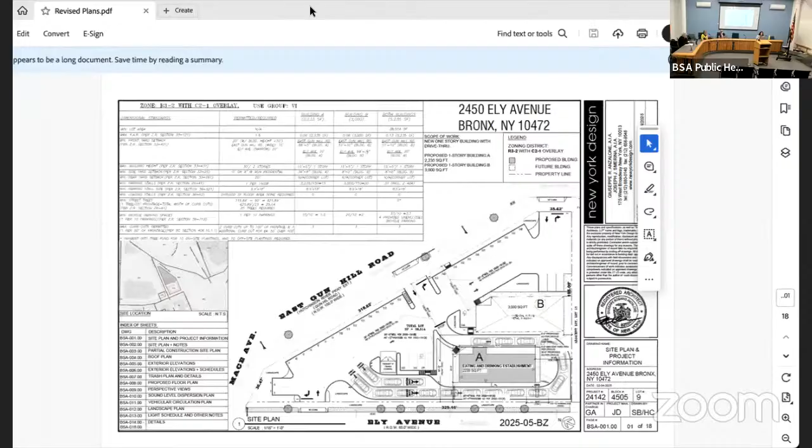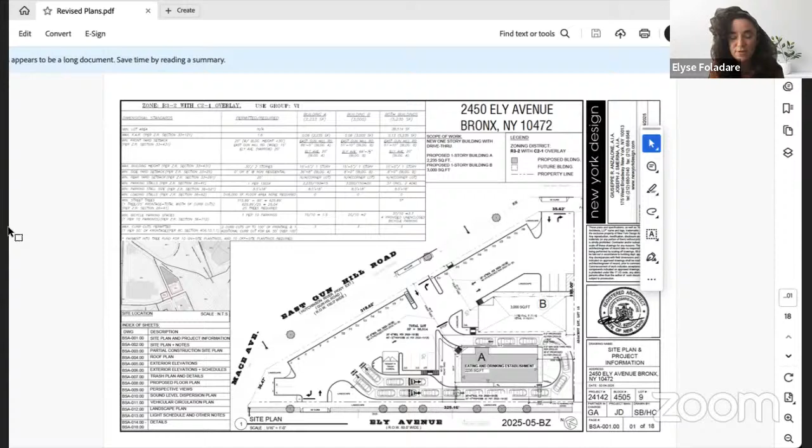Okay, here's the plans, sharing now. Everybody see the plans? Yes, okay great. So we did submit, hopefully, a darker set. I'm happy, Joseph can tell you, but he's happy to remove any excess notes and fix any sections that need to be fixed. Josh, do you want to talk a little bit about the big discussion about maneuverability and curb cuts? I'll just turn to you. If you want me to share any specific screen or your memo, I'm happy to do that. Maybe this - can we just, for simplicity, go to the radius map diagram of the roadway network of New England Thruway?

Yeah, that needs to be corrected. We need to see the roadway network of the New England Thruway coming out and off, and that needs to be corrected. The approach exit from the New England Thruway ramp is not lining up with the site, as you can see from this. Right now the approach is showing an entry ramp to New England Thruway, but it's not showing the exit ramp, so the placements are incorrect. Please go through the aerial map and correct it, because we need to understand what the traffic network and directional flows are when analyzing this site.

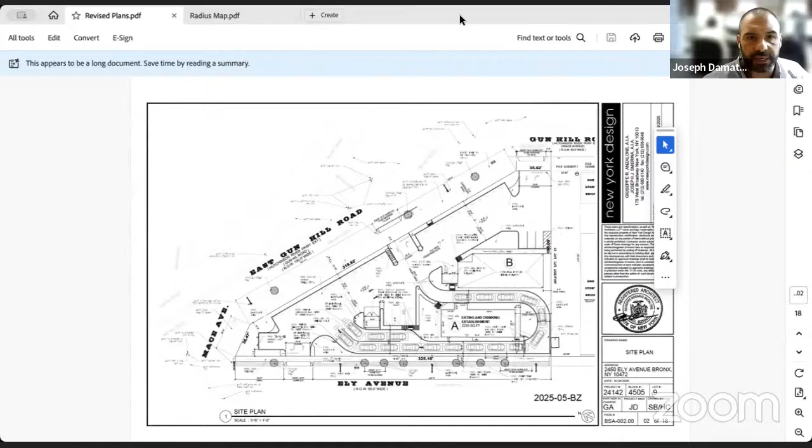Fair enough. Joseph, that comment was mostly for you. You got it. I think that was for Josh, yeah. Well, she's saying it's on the plans. Well, I don't know who does it, but I think the plans actually show it - my site plan shows that exit and entrance. Okay, 'cause Josh doesn't provide any plans. That's why I'm saying it's for you - a diagram, the radius diagram, that was just up. I can address it either way. Okay, I think that's right.

Please make them consistent. Wait, sorry, I'm a little confused - are we saying the radius is correct or not correct? No, it's not correct. Oh, the radius diagram is not correct. Okay, that was just provided by Urban Cartographics, so I will ask them to fix it. Yeah, the radius diagram is not correct.

And as I'm looking at the little site location map that has been provided - this one?

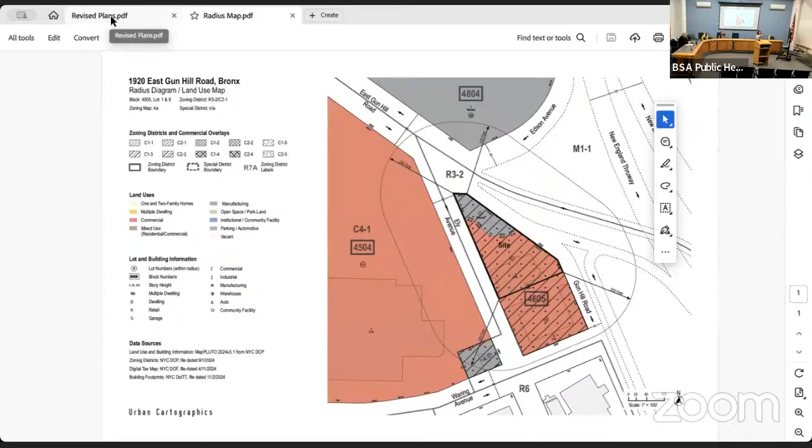Yeah, okay, sorry, that was from Urban Cartographics. I'll ask them to correct that.

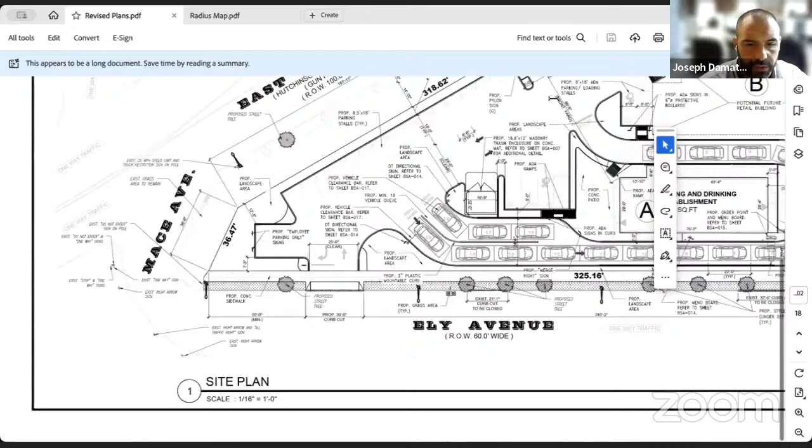And the site location map from here, I definitely do not know if it is correct or not. I do see one ramp exiting out, but I did not... if you zoom in, we have the arrows identifying that there's an exit there, and then the entrance is that one-way entrance. I can make it darker on this plan, but I believe it's all on there.

It's this, correct? That seems to be correct to me. It just needs to be darker. Okay, not a problem.

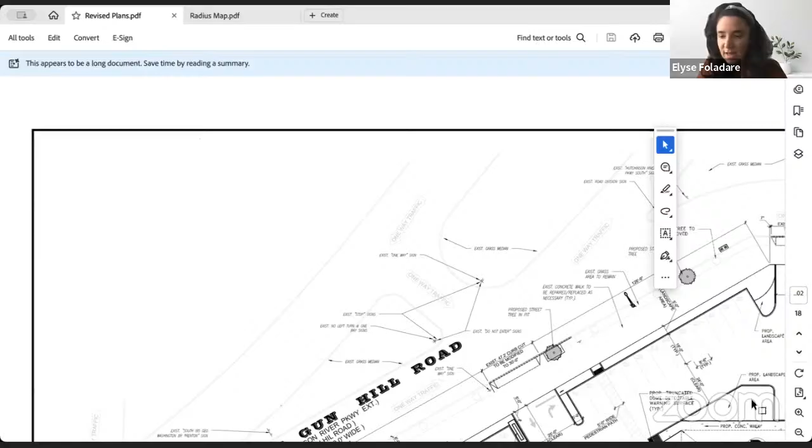Okay, so back to the curb cut conversation, I guess. And is that site location, Commissioner Ottley-Brown, can you also verify the site location map? If that exit ramp and on ramp to the Thruway is correct, because to me it doesn't seem to be.

No, it does. It actually looks like what you see if you look at the Google Street View. It looks like the exit comes off right where the curb cut is, and the entrance is just maybe 100 feet away to the right of the curb cut. So it looks like it more or less lines up.

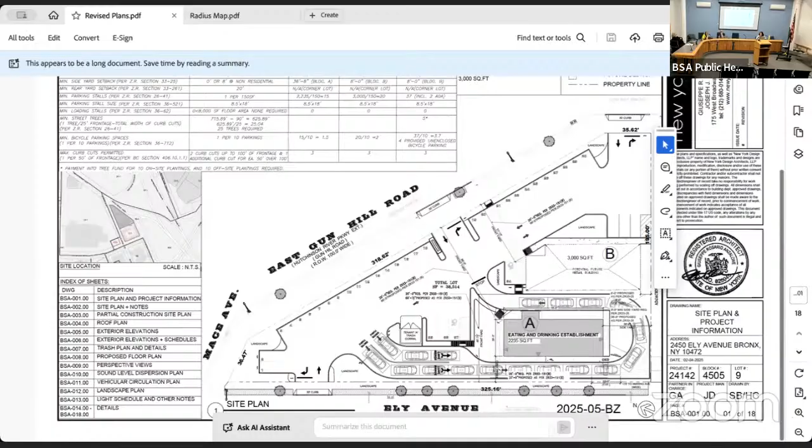I think, can you go to the previous page? And then zoom into the site location map on the left. I think that's what you're talking about, right? Oh, you're talking about that? Yeah, I'm looking at the site location because... yeah, you got to zoom in for that so I could see it better.

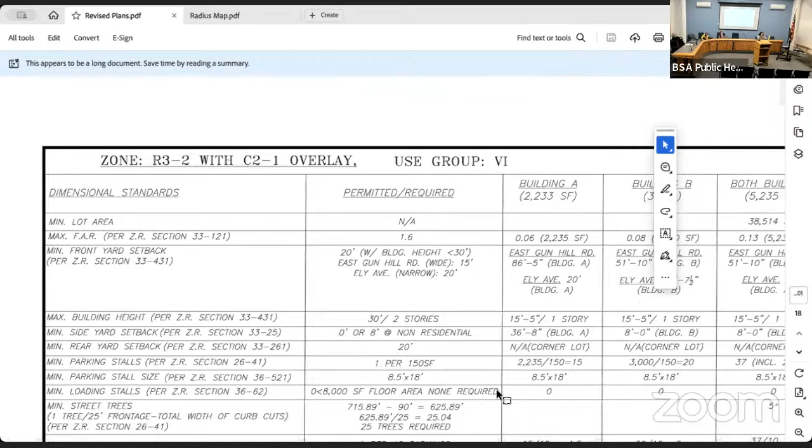Or let me look at my own plans, which I had brought up. Because I think it's the exit ramp from the New England Thruway and the on ramp to New England Thruway in the site. Not right, that's why I'm asking. I'm gonna just look on my own plans right now because I can make them larger. Let's see, okay.

And I'm being fussy about it because this is a very unusual site. We don't, most of our sites tend to be part of the typical city street network, and this is right at the mouth of the major throughways. So we have to be very careful.

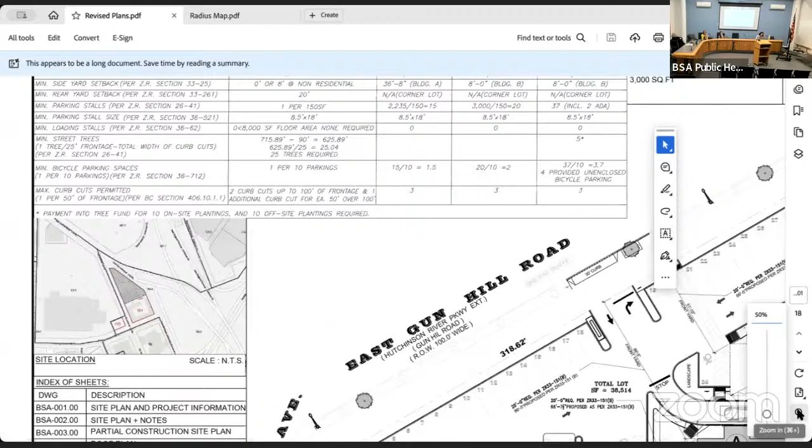It appears to be correct to me, looking at it, but because there are no dimensions and there's no curb cut shown on that little site location, it's hard to see whether or not it's lining up with the curb cut, but it is what you see there. There is that exit ramp that curves around, and then the entrance ramp is shortly after that.

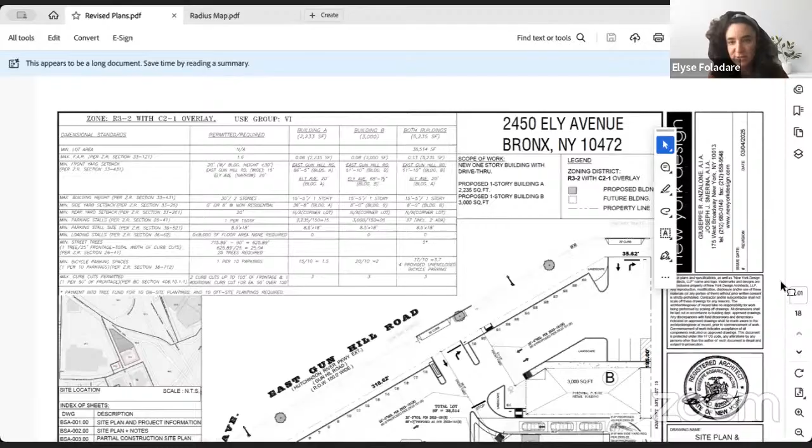Okay, so please make these graphics very clear so that it's absolutely clear to anyone who's reviewing it where the on and the off ramps and the approach ways are. And I think we're going to, as you suggested, do a maneuverability plan on its own page, so this way it's all dark, it's all clear, all the directional signs are there. So we'll add that plan. Okay, go ahead.

Okay, so back to our thoughts on the curb cut, right? Yes, so we heard the comments. Good morning, everyone. We heard everyone's comments on the curb cut, and understood the concerns about the traffic that would go pretty much straight through that median cut through.

So we were thinking, based on those comments, to shift the driveway further to the east to alleviate any concern about that, that people wouldn't be able to drive straight through. They would have to turn out of the site to go either west on Gun Hill Road or towards the thruway.

And then, in terms of ingress movement from the curb cut, people would have to turn through the median. They'd have to turn left onto Gun Hill Road and then turn into the site. So it basically alleviates any concern there about people shooting straight through the median and turning onto westbound Gun Hill Road.

So just so I understand what you're saying, so if I am coming off the New England Thruway exit, instead of coming straight into the site, the curb would be located a little further east of it?

Correct. So if you're coming off the New England Thruway, they would turn left onto East Gun Hill Road, and then turn right into the site.

So I have a question. I know you say you would consider moving the curb cut to the east. But to me, if you move the curb cut to the east to solve the problem of people coming off the northern exit ramp and shooting across all those lanes, you're going to have a similar problem with people exiting the site and shooting across the lanes to get onto the entrance ramp. It's kind of like swapping one problem for another.

What if you were to move the curb cut to the west along the site, which would force people to not use that northern exit to get onto the site? They would have to go onto Gun Hill Road and loop around somewhere to get onto the site. So you'd get rid of those people, and give enough room for the exiters to merge their way onto the highway - give them a little more linear feet, which might make it safer.

Yeah, that's something we could definitely discuss with the client. I don't see an issue with that unless Elyse or Joe, you do. But that's something we can discuss with the applicant.

We're losing you, sorry, we can't hear you, Chair. Yeah, I can't hear either. Can you hear me now? I can now, yes. I literally have to hug the thing. I don't know why it's doing it.

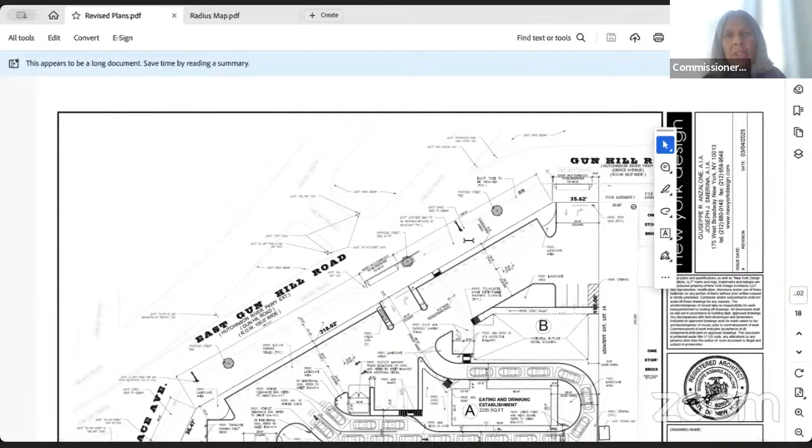I think that's a very good comment, and that's something we can address on our end.

We can't hear you. The audio is cutting out again.

So anybody trying to enter on East Gun Hill Road, that entrance would be moved further westward, allowing for entry and exit. This way, whoever is exiting can continue on East Gun Hill Road and merge with New England Thruway or Hutchinson. But anybody exiting from New England Thruway would have to make a left and take the entrance further to the east to enter the site. Correct, correct, okay.

That can work, and that can remain as an exit also, a secondary exit if someone wants to go to Hutchinson and avoid merging onto the New England Thruway. Yeah, that may work. Tracy's raising her hand.

Go ahead, Ms. I just had a question on the existing site plan, the one we reviewed. Did you have to go to DOT for any of those curb cut approvals, or would that just be if you moved that one to the west?

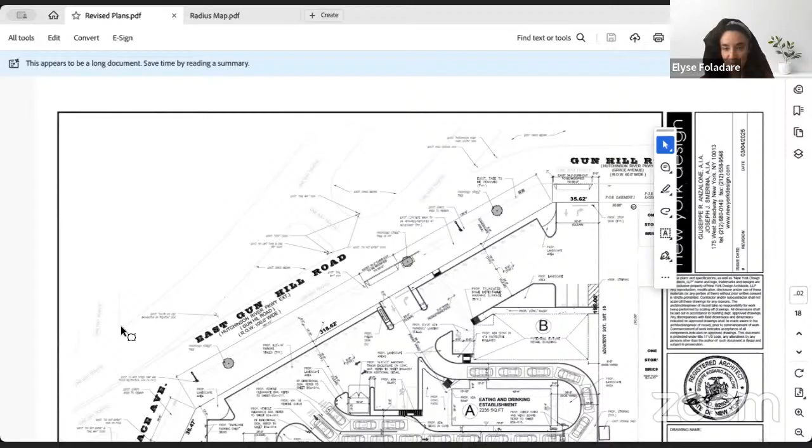I think a big comment was about landscaping and where to put fencing. Joseph, did that all make sense to you? Do we want to go through where the fencing and landscaping would be? We can show you samples. Yeah, I mean it was pretty clear, it's along Ely Ave.

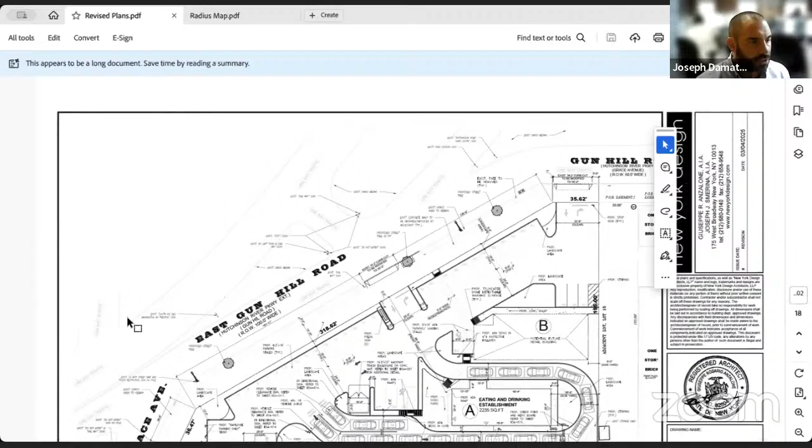Prevent the pedestrians from crossing the site. It's understood, we will provide a fence at that property line. We showed a landscape plan with all the landscaping and specific plant type on the site. I'm sure it'll be a little more legible on the new revised applications. Elyse, if you can just scroll down into the landscape plan.

And also I wanted fencing between the building entrance and where the drive-through is. What I mean by that, for example, where vehicles 14, 12, 13, 11 are, there should be a fence, or a raised curb, around that area that will prevent pedestrians from crossing over and across through the driveway.

Between the two buildings? Yes, one is between A and B. So you have A and B, where you have the... I don't know if that's a curb cut. It is, yeah, it's a pedestrian curb cut. So you can go from one side of the parking lot to the other.

You need to have a stop bar there and a stop sign. You have a stop bar out beyond that. So you need to mark that pedestrian crossing very clearly, so it's clear.

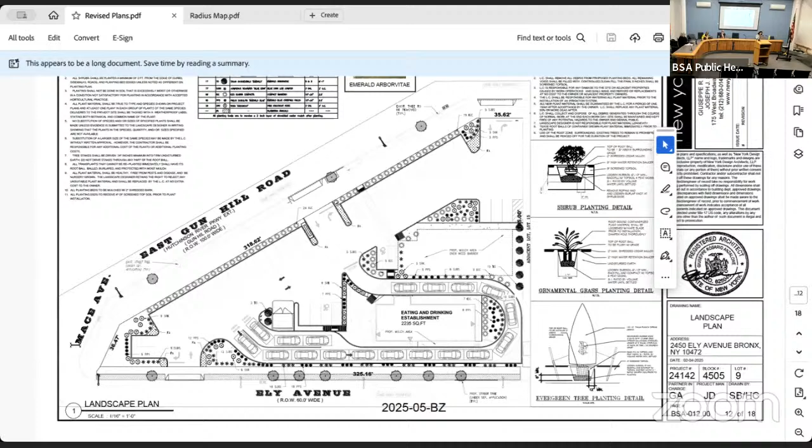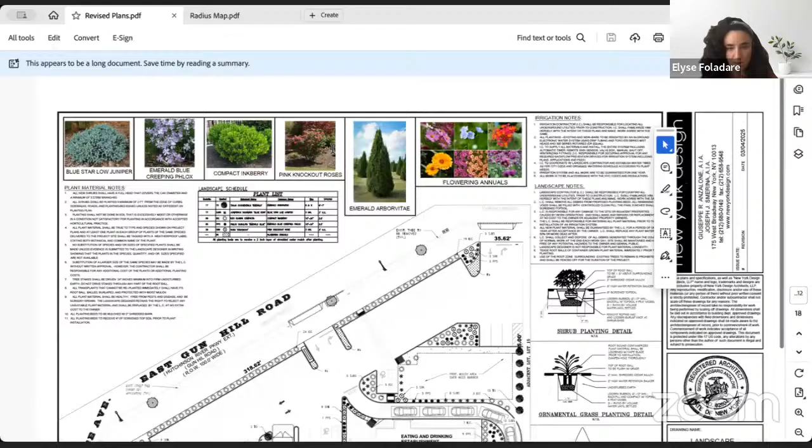Understood, so the fencing will add, but is this landscaping what you're looking for, or is it missing items? I don't see anything on the landscaping for me to understand what's there and what's not. Oh, so you'd like a schedule detailing... oh, this is a plant list right here. Yeah, but I don't know where those plant lists are going to be located. Oh, because it shows you the type, the detail, and symbols. Yeah, is this a recent submission?

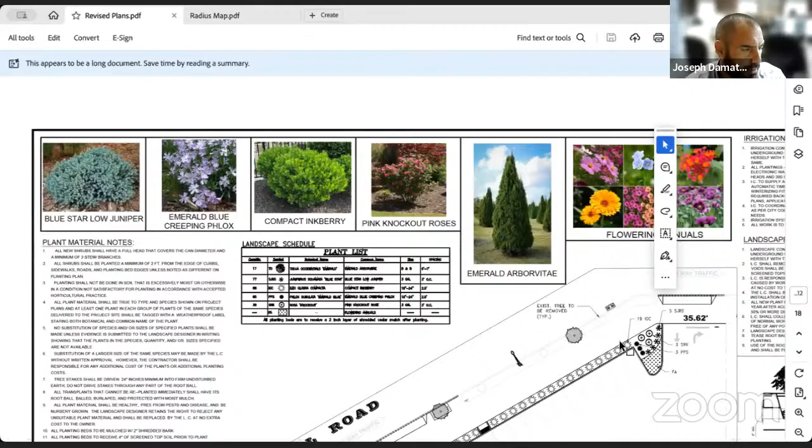Because I don't remember seeing this. There were a bunch of questions last week and we submitted them late Thursday. This was in the original submission, he said. We just added some clarification and made it more visible.

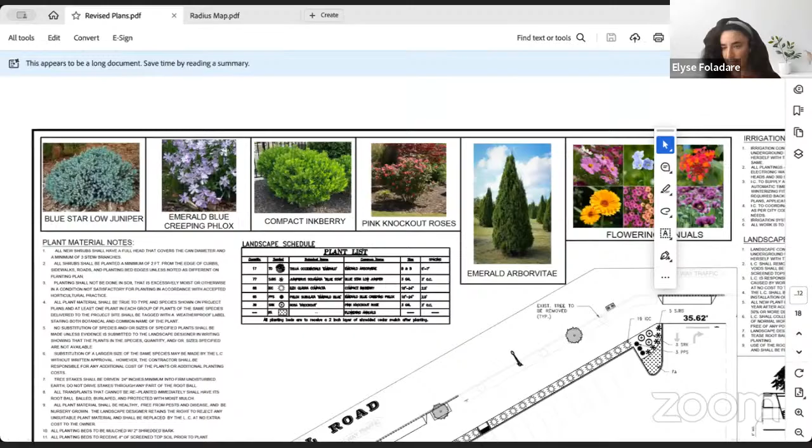So maybe we'll resubmit this with fencing included. I'm surprised that I missed this. I was looking for it and couldn't locate it, so my apologies. No problem, it's a large set, there are 18 pages. And we will remove the structural footing plans, as the commissioner had asked. That's not a problem.

I also see the plants in the back, those are along the rear. Can that be extended to the corner? As you can see, the actual lane goes up against the lot line there. Right, so it's gonna be very tight, there's no plant area. I understand that, but what about that corner where you're planning to stripe it?

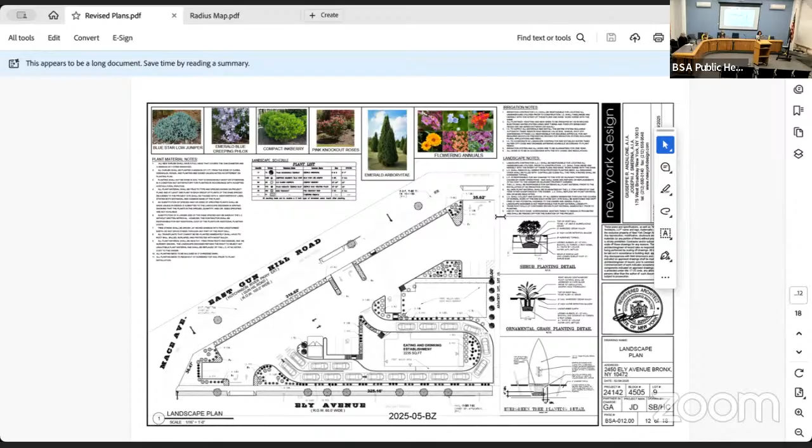Instead of striping it, can you put planting there? I don't remember, can I ask my team a question? Did he want to do access or something, cross access? Yeah, I don't think he wants to. I mean, we could, but with the easement, isn't there like a cross access thing? I don't know, I don't remember.

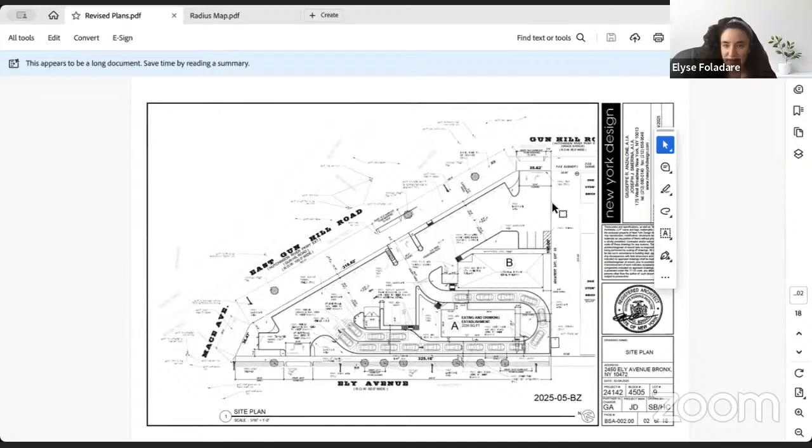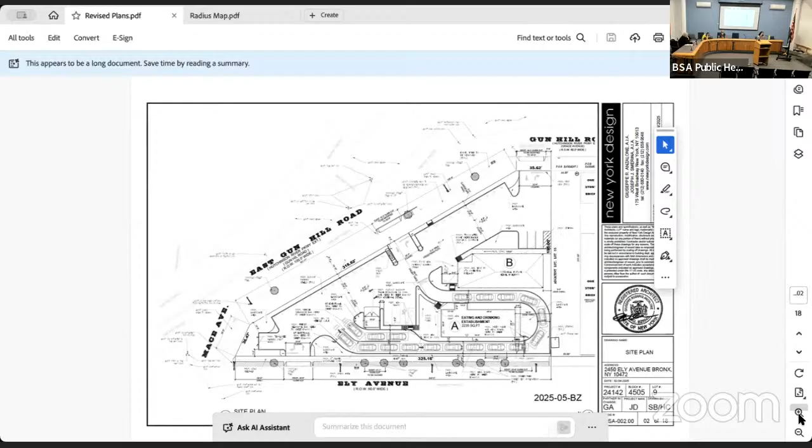I think the bottom right of the whole diagram, at the turn for the cars, there's a triangular portion in the corner that is striped. If you could zoom into that corner, down in the bottom right. Yep, you had your cursor right there, you have to go up. Yeah, next to where that arrow is, exactly that area. Oh okay, that area we can, it'll stop at some point, but we can landscape that corner.

We left it for maneuverability, but it's fine, we can do that. My other comment was the fence should wrap around to the rear lot line, and I'm assuming that is possible. This is again to prevent people crossing over. Understood, so you need to secure this from that conflict.

We can add the fence. Any specific fence? Can that be a continuation? It should be a fence high enough that no one jumps over it. Okay, and of course we would... it doesn't need to be noise attenuated, but you can have a nice PVC fence or a nice...

What is it, those chain metal link fence? A chain link fence? I'm not a huge fan of chain link fence, so if you can avoid it and make something a little bit more interesting, yet not too much of a financial burden. Okay. Yeah, the vinyl fence is costly, and in my opinion it's gonna create a separation and lose that transparency of seeing the site from Ely Avenue. But yeah, we could look into some options. Those are called for options.

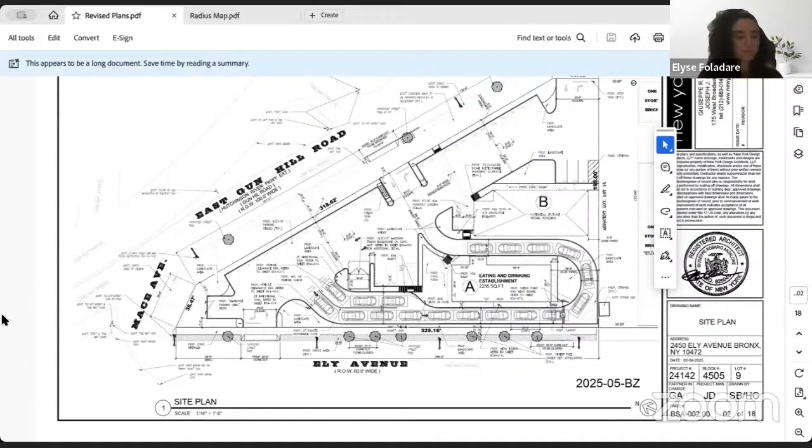And I think that, as you pointed out, we can get back to you, talk to Starbucks about how fast the cars move through and the operations, and really beef up that section with Josh and with Starbucks operations. Hopefully then that can answer that finding, because 18 cars is way more than even it would, that we would always have enough room in our queuing.

Right, it's more than we would anticipate, and yes, especially with the shift of the driveway to the west, we could provide that information, but it might change a few things. So we'll follow up with that information. Okay, all right.